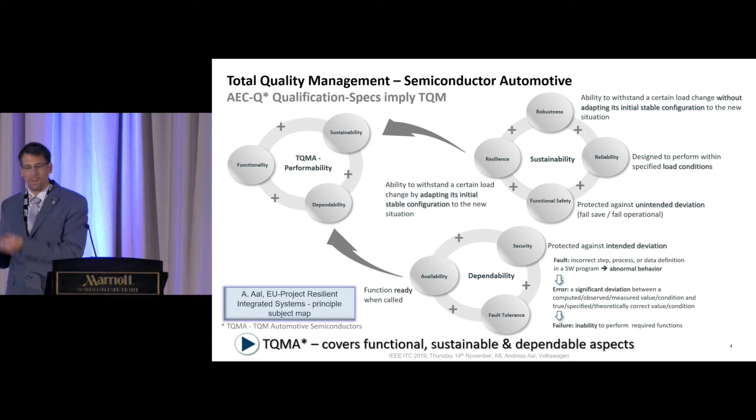And I got the question yesterday, what are load conditions in automotive? Load conditions are in principle the sum of all mission profiles, consisting of the manufacturing history of the part, plus the environmental stress profile, plus the operation profile that is also related to the overall construction. So here we have a defined specification.

So what happens if the actual use condition is beyond that? When the system can withstand conditions out of specification, that is what we call robustness. We have a robust product that can withstand something beyond what was originally designed.

The next part is resilience. That means the ability of the system to adapt to changes in the load conditions. That's very important. It's also related to what you call resilience here at this conference, and we have to have that also in the automotive domain. And all are related, of course, to functional safety. So having said this as a basis,

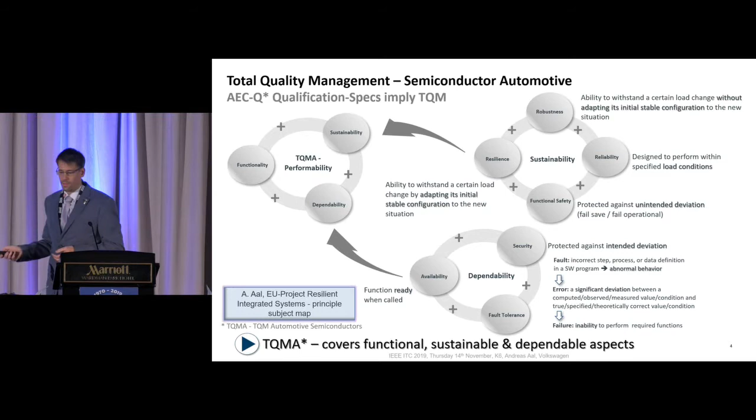Thank you. Having said this, some appetizers up front. One towards cybersecurity. A system is cyber safe if and only if there is a justifiable and enduring confidence that it will function as expected when expected. So what does it mean for an architecture of distributed ECUs in a car of today, where we have limited knowledge about the inside, a kind of black box situation? You can infer that it will get more and more difficult. So from a functional perspective, looking towards security, we cannot afford anymore to go on with the architecture as it is today, and we saw it in the NXP talk yesterday.

And we have another issue related to lifetime, that is firmware updatability. When we're talking about enhancing security algorithms, with changes going on, then we eventually need to update semiconductor firmware too. How often can you do that? What is the relation between this software and the hardware inside? That also leads to the fact that the overall strategy needs to change. We cannot test a network of black boxes unless behavioral models are accurate. So who designs those models?

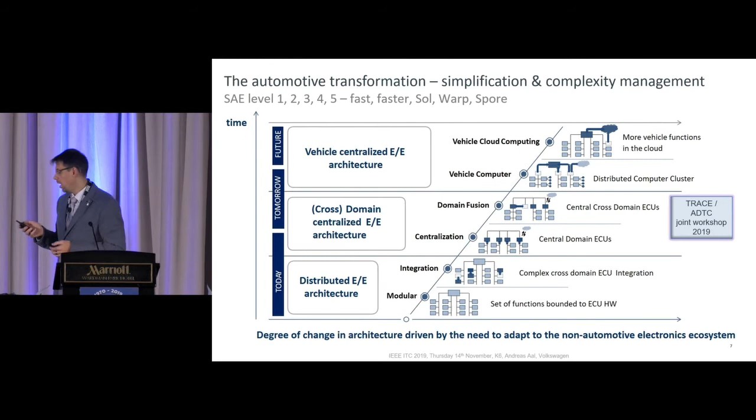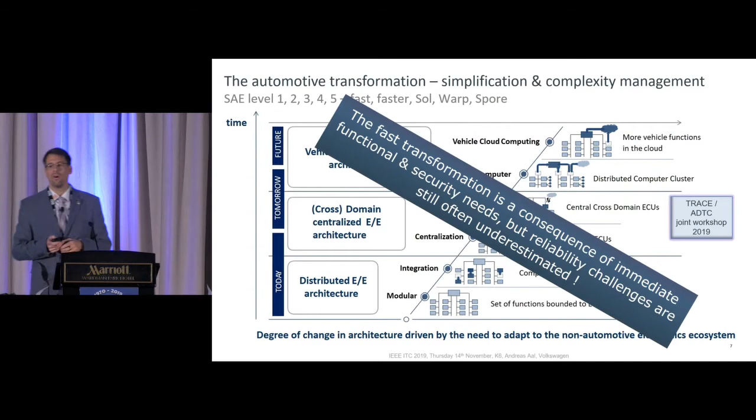And when you increase the software content by software updates, it's not just a fix or a change. It means you increase the number of functionalities in the car. So it's a completely new function, new concept you have to take into your design environment and consideration. So unfortunately, doing this just from a functional perspective does not necessarily address all the issues that arise from a reliability perspective.

So from an automotive vendor, when we deeply look into electronics and assembly options that we get, we see, of course, they are very, very complex constructions. Mechanical engineering plays a role. We come from mechanical engineering, just on another size level, of course. We understand that the assembly process, so the history of the device during manufacturing, the various players in that field and the materials, is getting more and more complex.

We have several lessons learned out of non-aligned activities here together with automotive load conditions as discussed before. So safety is very much dependent on this, because testing cannot compensate for gaps in the design for reliability aspects. So you need to understand the failure mechanisms to design around or to monitor and to define actions.

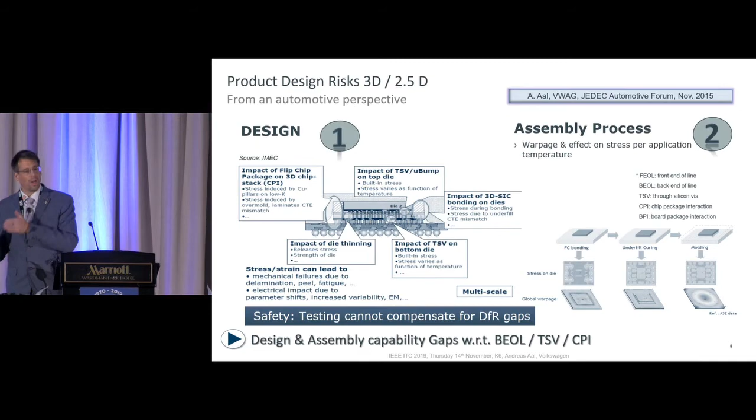Of course, last but not least, the third part is testing, and we discussed also yesterday regarding 3D testing that there are quite some challenges even in the consumer domain. If it comes to a very complex construction in the automotive domain, things are getting more and more critical, and I will show you some examples afterwards.

And of course, today, qualification, if you look at traditional test scenarios, you need to rethink. Are those conditions now damaging? Are they actually appropriate for this new system? And we had very interesting discussions during this conference regarding burn-in of multi-chip packages, multi-chip modules, and so on, where you have various technologies coming in. So you really have to go into the depths to understand what's going on.

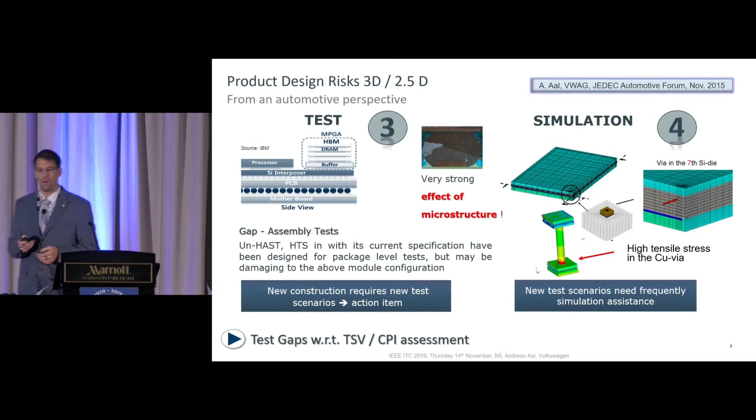And simulation, of course, is now an integral part of qualification and risk assessment. And there we have also a huge need to understand from a system level perspective what's going on. So going to the first real examples, as I stated, the function we require is bound to the technology node, and the technology is bound to the initial key product design, which is not coming from automotive. That is the case as of today.

Reliability and performance of those technologies are at risk under automotive load conditions, and we can principally categorize these in stress exceeds strength, so from a material construction, CTE mismatches, and so on. And the other side is that we have parametric deviations, where we also have different classes: event-driven and reversible, event-driven and not reversible, and so on.

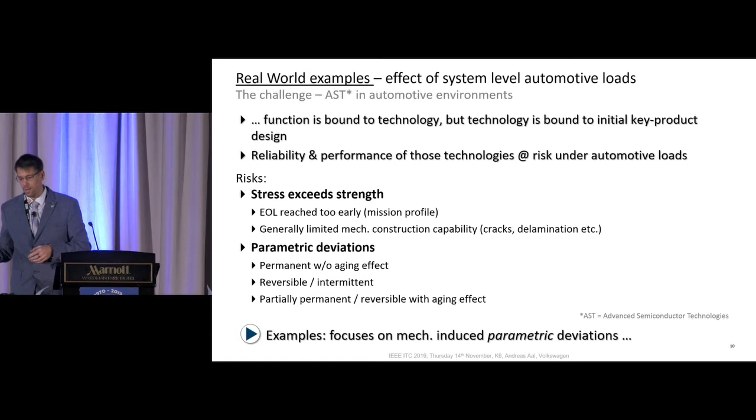So it's getting more and more complex, but you have to, to really understand what's going on. One example is shown here. As a symbol, you have a parametric distribution in the final test, very tight, fine, and then you have fails in the field. And these are examples from 3 different IC vendors we had in the history, and it took us 2 years to investigate, to do the root cause analysis with the help of the supply chain to adapt actual functional testing on the board.

And what we figured out, the distribution of those parts that were originally like this, after the whole construction ended up to be there. So that means the manufacturing processes afterwards that are not in your hand can have a tremendous effect on your part, on the functionality of your part, so the parameters. And we figured out, this is what I can say, that mechanical stress plays a huge role in this.

So especially in advanced nodes, here are some examples from IRPS or from Intel in principle, that as you thin down the chip inside the package, the severity in the active area towards parametric changes increases. And in reality, it goes down even more based on the experiments we have performed.

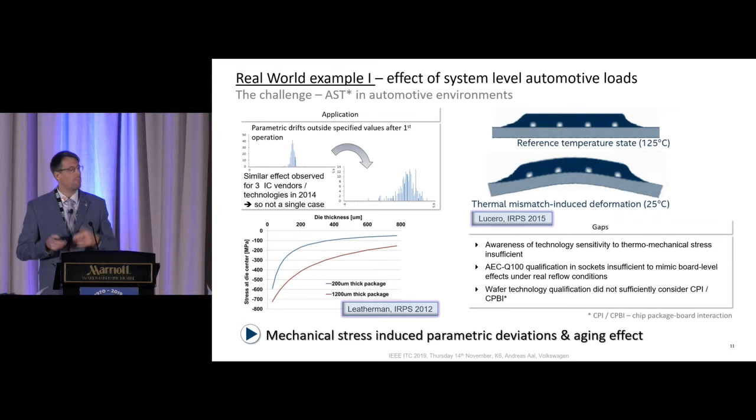So after having done that, those 3 vendors didn't allow us to publish. They didn't allow us to say to the industry, we have a problem here, let's solve it. They feared that would affect their business. So we had to do our research on our own to say, now we can publish, now we can state, we have a problem here, the industry needs to understand this.

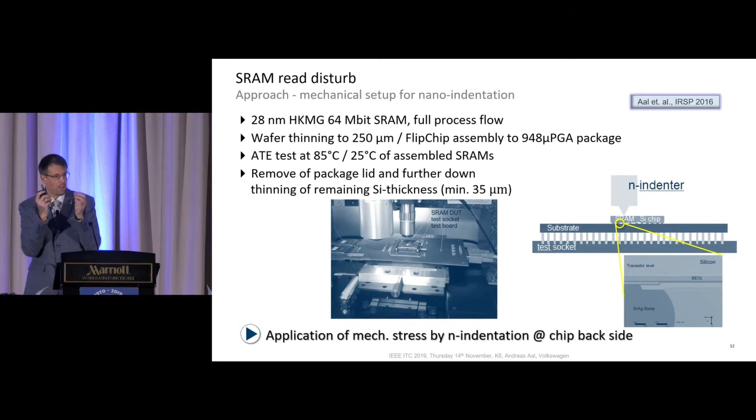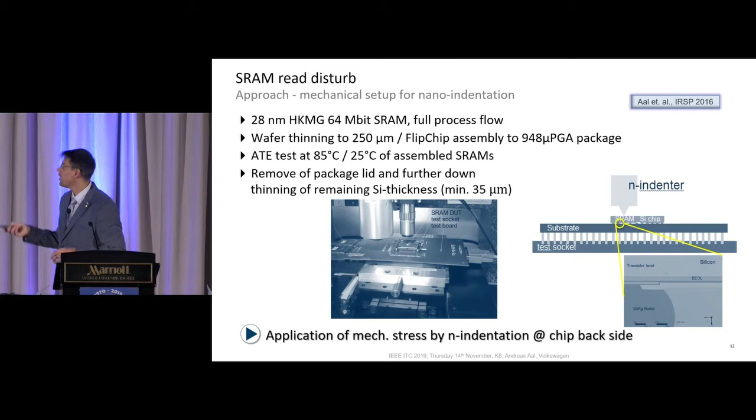What we did here was a nano indentation on an SRAM chip while it is running. And in order to increase the sensitivity, we performed the read-disturb procedure by bringing the SRAM chip into an under-voltage scenario, just at the limit where the bits would flip. So that means we repeat the measurement, we see, okay, it is now in a 0 or a 1 state, and what happens if we apply mechanical stress. So it's just a trick to figure out what a mechanical stress can do.

What we figured out then was, with a scenario where we actually applied a statistical methodology, repeating this many, many times, you could really see a correlation between the indentation point and the probability that at those positions the bit flips. So we also later go up in voltage, do the measurement again, and so on. So with a dedicated procedure, we could make a correlation for the various stresses.

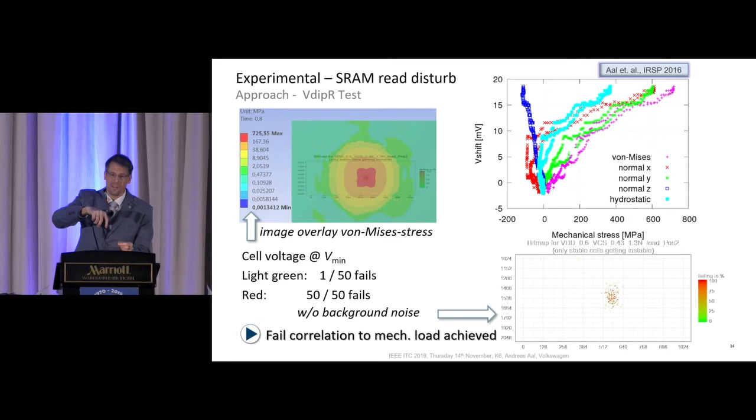And we could apply this then to a complex package design, meaning especially we could identify the effect of placing the copper pillars at various positions, because the interesting thing was, once you press from top, it is the distribution of the position of the copper pillars that affects whether you reach 1 gigapascal in the active area or not. So that is one thing. It's just to prove that the root cause of the real fails we had in the field was proven by this methodology.

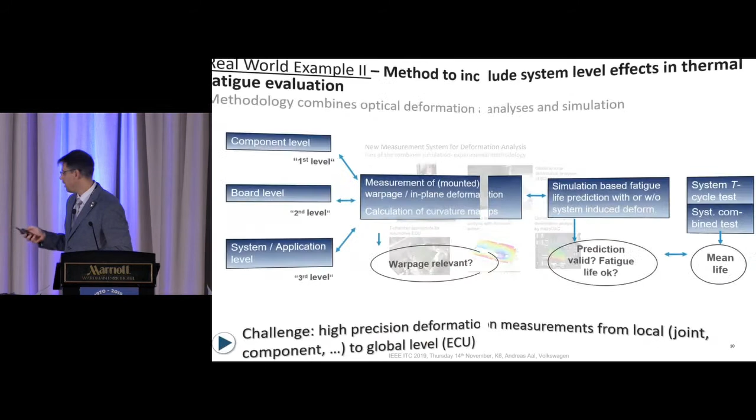Okay, the next one is related to solder joint reliability in the overall construction. We looked at the component level, we looked at the board level, and we looked at the system level by really applying a new measurement methodology that allows us to measure local CTEs on the board. By this, with partners here in the European project, we can create local and global deformation maps in the system. So this is not thermography, this is really a map regarding deformation on the board.

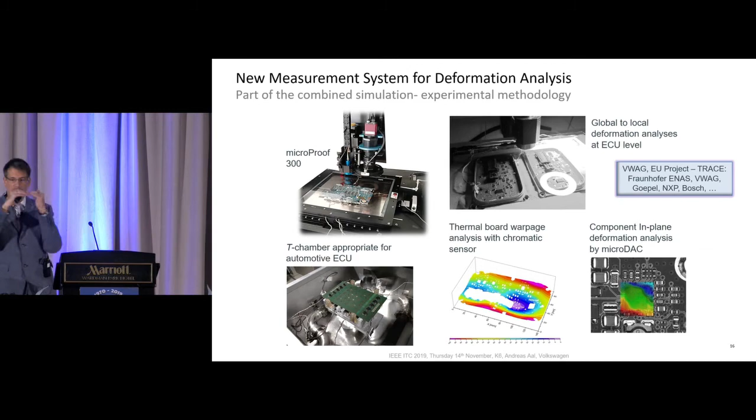And there we had very interesting results, so that depending on the amount of temperature shocks you're using and also on the temperature you run, you get various different maps, which in principle means that based on the mismatch of the CTEs of the materials, we have really something going on in the material, and it is really depending on the board layout, on the placement of the boards, on the stiffness of the board, and so on.

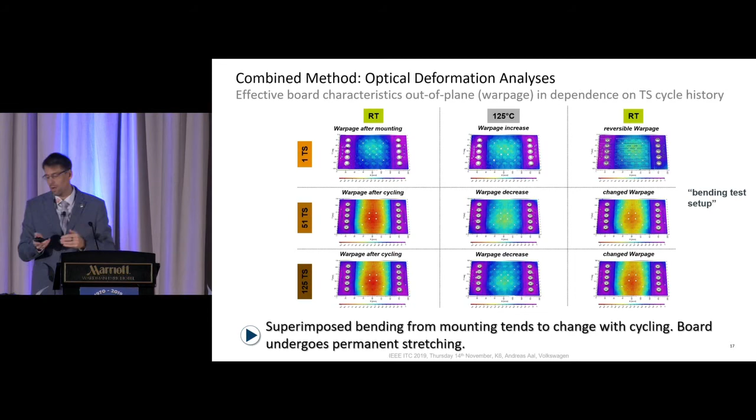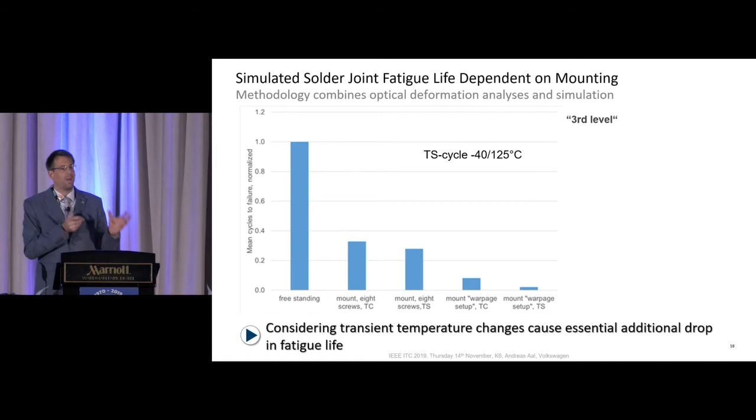So this was done on experimental setups. And the outcome was actually that we have a huge influence whether we have a freestanding situation, if we mount it with screws, if we tighten it with the board, with the housing. This was simply experimental with a test board. The actual situation we did then with a real

application, and the key message I would like to bring is, by doing the same tests, the board level tests that are usually applied in the industry by applying IPC standards, for instance, that show that the cycles to failure decreased by a factor of 10 just by screwing the board into the aluminum housing. So this is especially related to QFN or BGA packages. So this is also a clear message.

We didn't have these issues years ago, but then we had also smaller boards. So it's obviously strongly correlated to the placement and to the size of the board and also the bending. So what we need is design rules where to place screws and so on, the simulation foundation for that in order to cope with this complexity, or we need to change our complete design methodology at all, just as a hint.

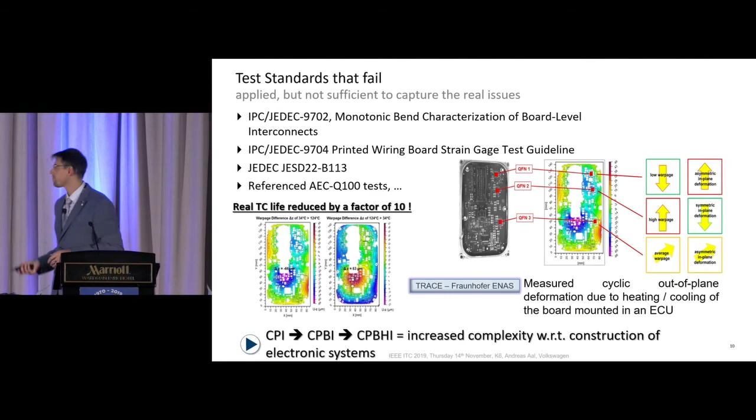So the last one is related to digital IP. Some functionality we need to add in digital IP to be automotive compliant. And the only message I would like to bring here is that it is related to environmental or operating conditions out of automotive that are technology dependent. We need to add something to compensate for certain failure mechanisms that otherwise in the consumer domain wouldn't play a role.

So you do that, of course, and this is an example out of the European project on the RTL design level where you include the resilient IP. This was the same project that was also related by the Mentor Graphics presentation where you saw from ST Microelectronics this interesting monitoring methodology that was also done together with Volkswagen in this project, and we learned also from that what you can actually achieve by doing so.

The problem is, this is an older example, but it shows in principle, you take those methodologies, those to be resilient, and now you have to combine it with the real situation. So simply taking what is already available is not sufficient. You have to re-evaluate it, and then you figure out you have a redundant path, but actually now due to parametric deviation because of thermomechanical load, this more sensitive path reacts, and now this is a sort of source of failure in automotive. This is exactly what you don't want to have.

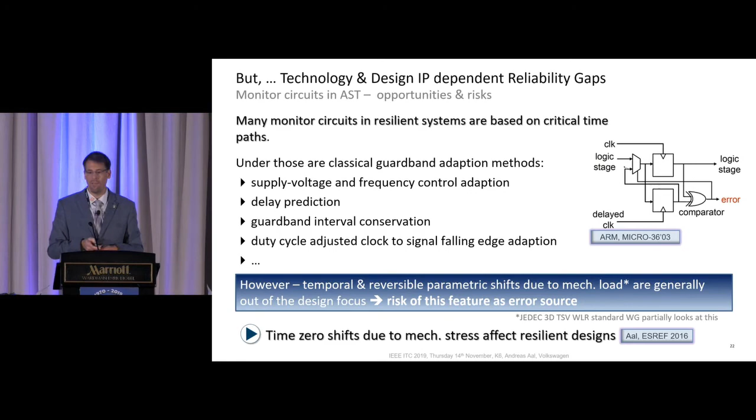So the last example shows here that by aging a board with microcontrollers with BGA solder balls, we actually, with the help of the European project and also with Goepel Electronics, which is a partner from Volkswagen, established a measurement methodology based on the bit error rate test scenario to detect very early by repetitive measurements that there is a nano crack evolving in the solder ball, and the effect is that the bandwidth of the PCI Express, for instance, can change here.

So it is very essential, especially for autonomous driving, to understand what bandwidth do we require, and is there something that can affect this bandwidth? And we have shown here also there is something going on. Research is further going on, but we have to look at it in order to be sure.

So this is just an example saying here it's a continuous degradation. It's hard to see at the side of these QFN packages, and you have a crack evolving here with a number of cycles, and you can see this actually in the statistical representation of the eye diagram. So the detection level can be very low, at least in these first experiments we have performed.

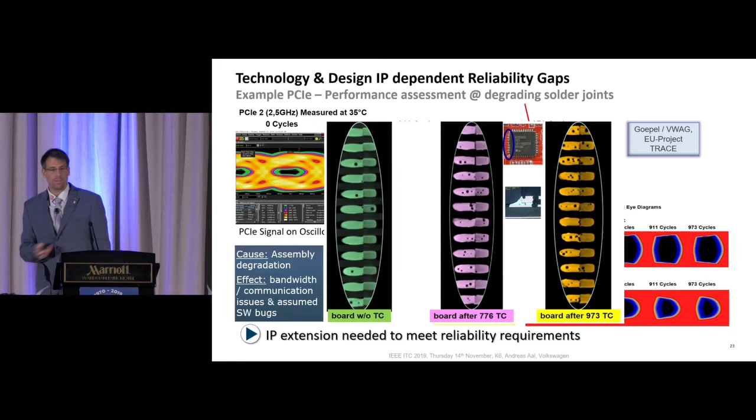The last thing I would like to address, and this is very much related, and I'm very happy that I found this mindset at this conference, is collaboration. Most of the achievements so far, as I recognized, came from working together. And in the automotive supply chain, as we also know, we have the role to drive this transition, to drive the different architectures, we need to collaborate.

We need to work together with the semiconductor industry, and this is actually not so easy from a legal perspective. So what we have done is that we founded the Global Automotive Advisory Council in SEMI. It was also announced 2 days ago that Volkswagen is now a SEMI member.

And we have created a legal framework that is called Platform for Automotive Semiconductor Requirements Along the Supply Chain that is based on US and on European law in principle as a guideline that allows to form chapters and platforms per world region where companies along the supply chain can discuss technical issues that they have in common. And the beauty is that there is also reporting infrastructure, and that the council, with the standardization organizations, with the expert groups, with road mapping organizations, will define memorandums of understanding to have a clear view of how we communicate information and how this can bring value to the whole chain.

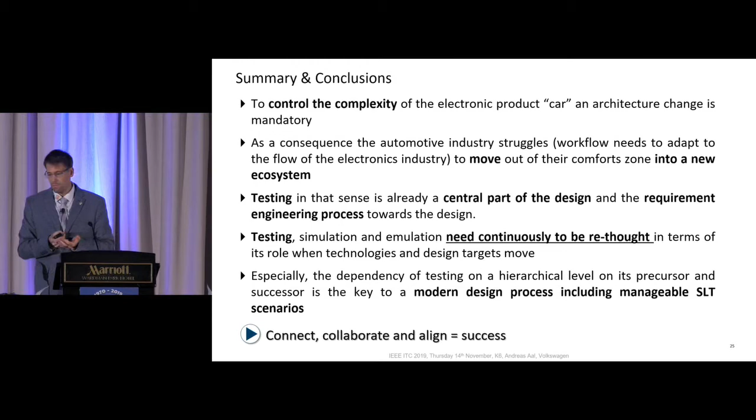We are moving into a new ecosystem, and we need the help of this ecosystem to be an integral part of it. And I think testing is the essence of that, because testing is the basis for the improved design, as well as for autonomous functionality testing, continuous testing and monitoring. I say SBIST, system level built-in self-test. This is something we need. And of course, testing always needs to be rethought in a new environment. So from that perspective, thank you very much for listening, and I'm open for questions.

Thank you so much. No questions? Excellent talk. Thank you very much. I'm sure you'll have more questions during the break, though. Yes, no problem. I'd like to present this to you. Thank you. Something very special. Thank you. Congratulations, and look forward to having more interactions with Volkswagen. Does it work with Google Translator? Try it. Yeah. Thank you. Otherwise, we have help. Yeah. Thanks.

Yeah, as you see, we are expanding our automotive presence inside ITC with numerous talks, including the workshop that we'll have later this afternoon, starting at 4 o'clock, the Automotive Test and Reliability Workshop, which will be part of the program. Now, we saw Andreas' talk. With ITC Test Week, I promised you at the opening session that we'll have 6 visionary talks. We have done 5 so far. We're getting ready for the 6th. We saw the 6 keynote talks. We saw together the Global Test Forum. We saw the pitch tank, the Sky Talks, 1 left this afternoon.

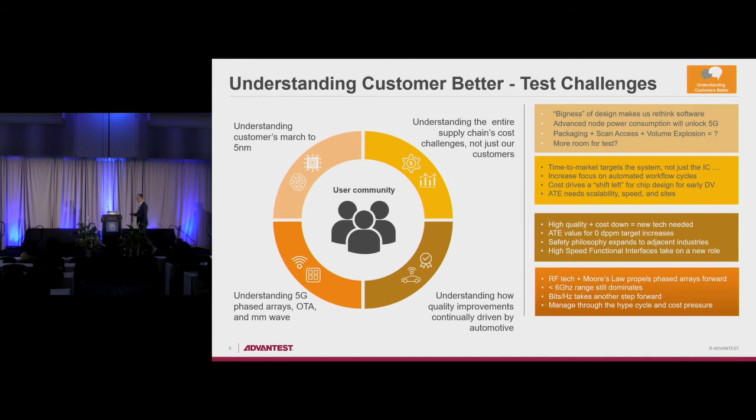The second use case is decision making. So imagine in the near future that you will be able, with reasonable accuracy, with just a few measurements early in the process, to predict the yield of the wafer. Imagine how that's going to completely change volume planning or supply chain management. So right now we have these huge peaks and valleys when yields suddenly drop off, and our supply chain is forced to absorb that. It's very costly and it's very inefficient.

But imagine if you had a priori knowledge that your yield was going to drop in a month. You don't know why. You just know it's going to happen. What would you do? Well, obviously, you'd go ahead and start additional wafers. And how would that affect the supply chain? Well, the supply chain would maybe feel it as a ripple. So instead of these huge spikes, it would all get averaged out. And that's going to help our entire industry run much smoother, much more efficiently.

And it might sound like magic, but this has already been demonstrated by the fabs. This has already been proven. And we know that it works because next generation devices are the children of the previous generation. So they share an enormous amount of DNA. And just like the child and the parent share DNA, if you have measured the parent across this entire test flow and collected all of this data and have all this understanding of the parent, when that child is first born with just a few measurements, you can make very accurate predictions on how that child will perform or how that child will yield. Terms like overcapacity and underutilization as problems, they may start to disappear.

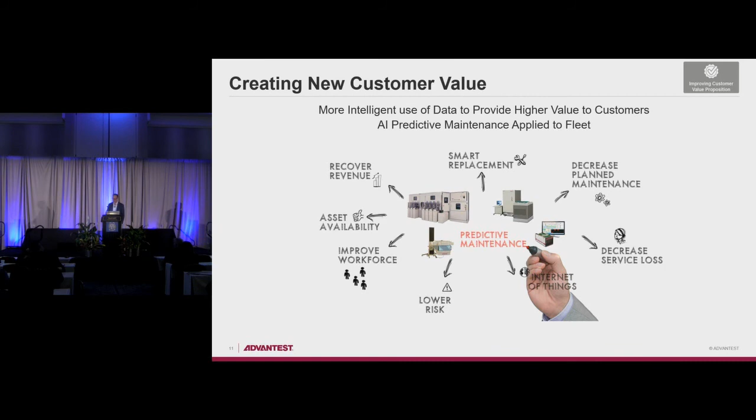So one of my favorites, monetization, again, data as an asset. And how can we use that data to drive new businesses and new services? So perhaps you've heard the term in Industry 4.0 called digital twin. Digital twin is where you create a digital replica or a digital ghost of a tool or an asset, and you host it in the cloud. And then we could offer that as a service or as a product. We could lease it. We could sell it to customers that want to run their data through these virtual insertions.

So we could have multiples of these. We could have a wafer virtual insertion, a package virtual insertion, a system level test virtual insertion. And the customers could actually run their data through all of these insertions and get a very good predictive understanding of how it's going to perform through each of those stages. What's it going to cost? What's it going to yield? If you knew before first silicon that you were going to yield 18%, is that valuable to you or not? I think so.

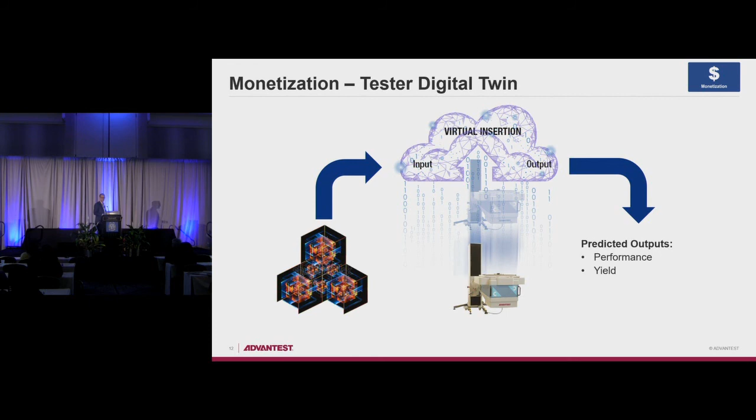And the fifth and the last is automating and improving business operations. So we talked about hurry up and wait, and automating some of those processes.

So I think Mike Campbell gave a visionary talk, and he talked about how he has 300 engineers, and they're bogged down in the tedious minutia of this manual scripting and converting and all of these things that have nothing to do with engineering. And he wants to offload that and upskill those engineers so they can work on truly test engineering tasks or product engineering tasks and not have to deal with all this underlying minutia.

And if you haven't seen it, Professor Li-C. Wang has some software. He's demoed it a couple of years here at ITC. It's called IEA, Intelligent Engineering Assistant. And what it does is it uses machine learning to look at a bunch of wafer data and give you insights into that data, suggestions, recommendations, things to go look at, things that you might be concerned about.